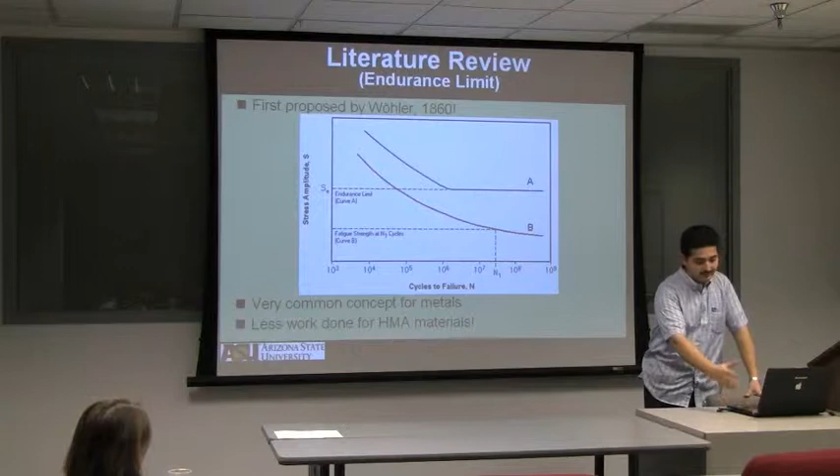So if I apply very high stress, the sample will fail quickly. But you need to reach a certain low value for the stress, below which there is no damage anymore. This concept is very common for metals, but very minimal work has been done for hot mix asphalt. This concept started in 1860, and it got picked up by our community in 1972. So it took about 100 years.

Monismith and McLean in 1972 proposed that the endurance limit for hot mix asphalt is about 70 microstrains, and they tested several stiffnesses. These lines represent different strengths of the pavement, which can vary based on several factors I'm going to talk about. They said the endurance limit is constant regardless of stiffness, and I kind of disagree with this conclusion, because I still believe the endurance limit will change with the strength of the material. But at least that's how they started.

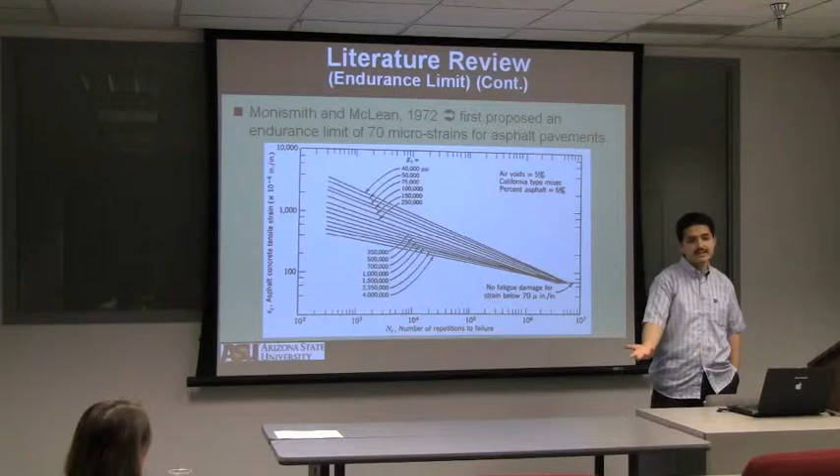Then this concept traveled all over the world and went even to Japan. Nishizawa in 1997 also reported that the endurance limit is about 200 microstrains, and he came up with this conclusion based on analysis of field pavements in Japan.

Wu in 2004 reported that the strain levels at the bottom of the asphalt layer ranged from 96 to 158 microstrains, based on back calculation using the falling weight deflectometer on some pavements in Kansas.

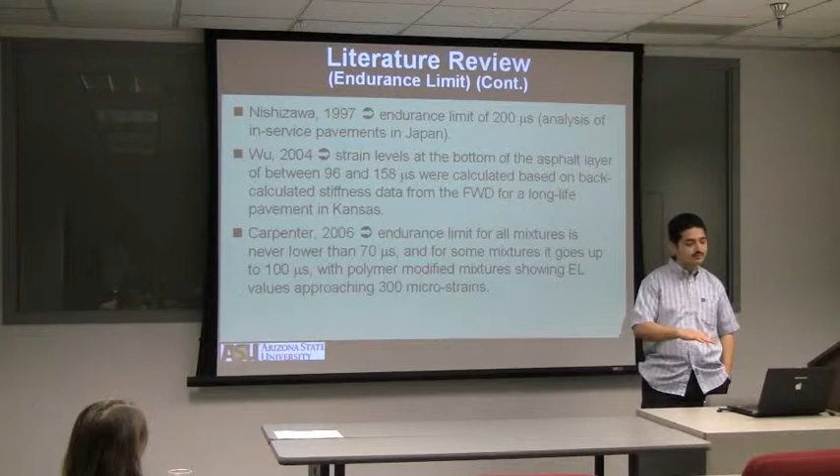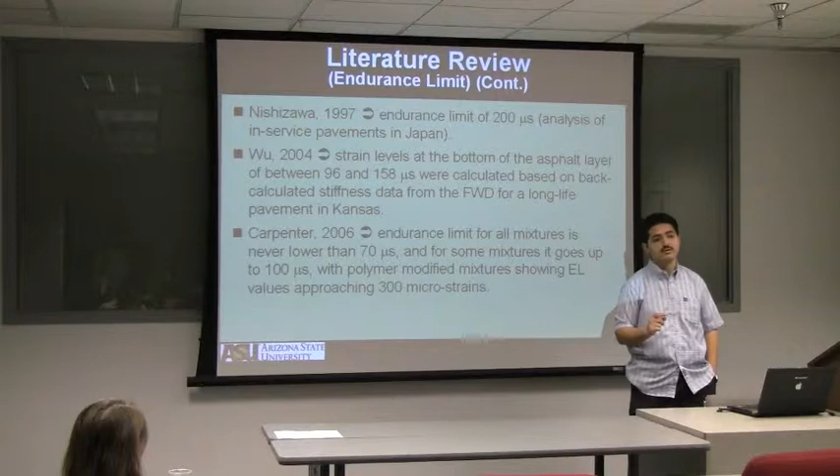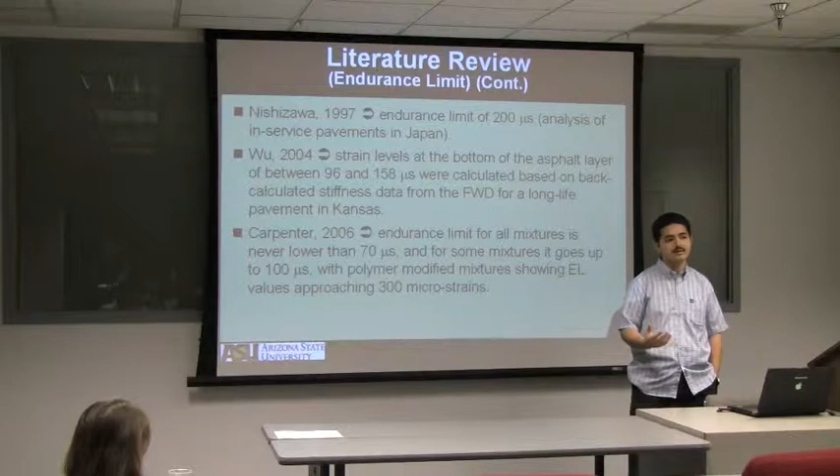Carpenter in 2006 reported that the endurance limit is about 70 microstrains, and it can go up to 100 microstrains in certain cases. What's interesting in his recommendation is that the endurance limit can be pumped up all the way to 300 microstrains once you modify your mixture by adding polymer or asphalt rubber. This shows that the endurance limit can change or improve by modifying the asphalt mixtures that we have been using for the last 100 years.

After several researchers did these individual studies, the endurance limit concept became a national interest, and there were two national projects totally concentrated on it, besides the one I'm working on. These two projects were NCHRP 9-38 and 9-44, and both showed clear evidence that asphalt performance is totally different once you apply very low strains.

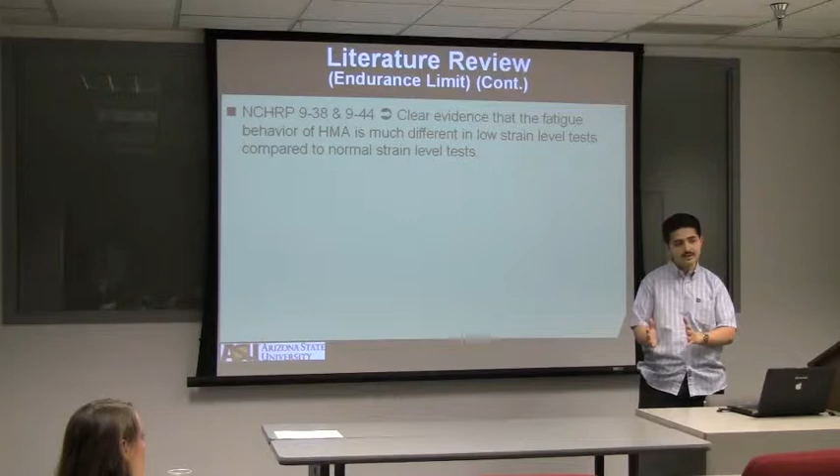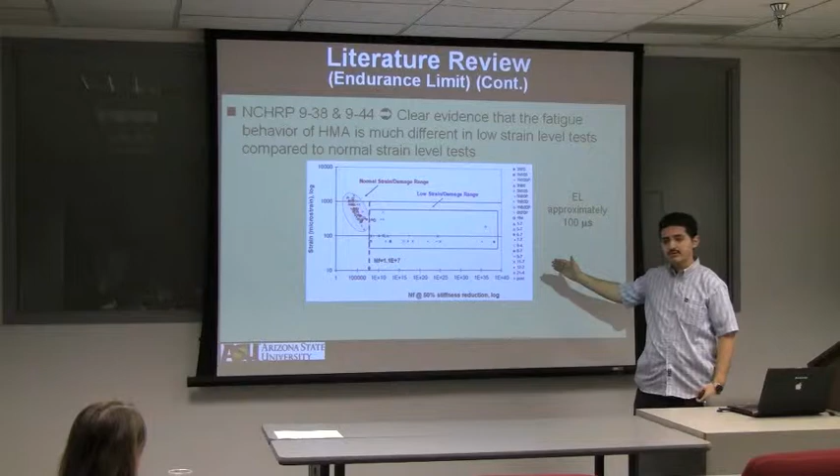What happens in these two projects involves normal strain levels or low strain levels. In the regular fatigue analysis we usually do, we apply very high strains ranging from 200 to 1,000 microstrains. But these two projects, once they decreased the strain or deformation on the sample to 70 or 100 microstrains, the sample wouldn't fail even after 50 million cycles. So they concluded there is mounting evidence that there is an endurance limit for hot mix asphalt.

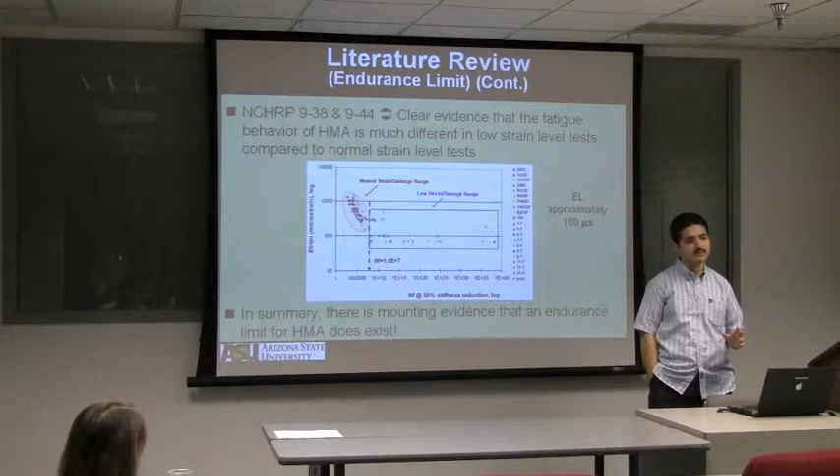So now, after I studied healing and endurance limit, I came to a step where I need to come up with my statistical experiment. I need to know what are the main factors I need to study or include in my predictive model.

So these are the factors that I used. The binder content - when I say binder content, I mean the percentage of binder in the mixture itself. Going back to the road, most of the time the binder content is about 5%. But I was interested to see if I change this binder content plus or minus, let's say 1% or 0.5%, is it going to change the endurance limit or not?

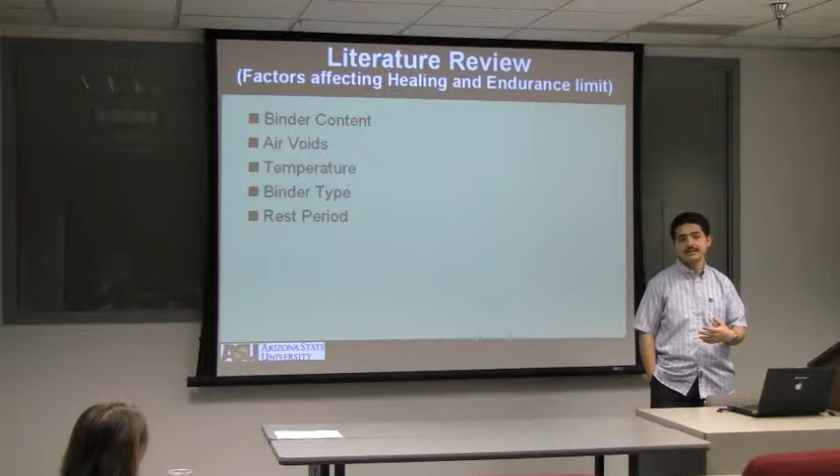Same thing for air voids, or if I change the temperature or binder type, or even the rest period, which is the most important part. If I put 5 seconds rest period between each cycle versus 10 seconds, am I going to see a difference in the endurance limit or not?

One of the projects that talked about the effect of the air voids and the binder content was the SHRP A-003A in 1994, and they mentioned that at higher asphalt content and lower air voids, this can lead us to a very high fatigue life.

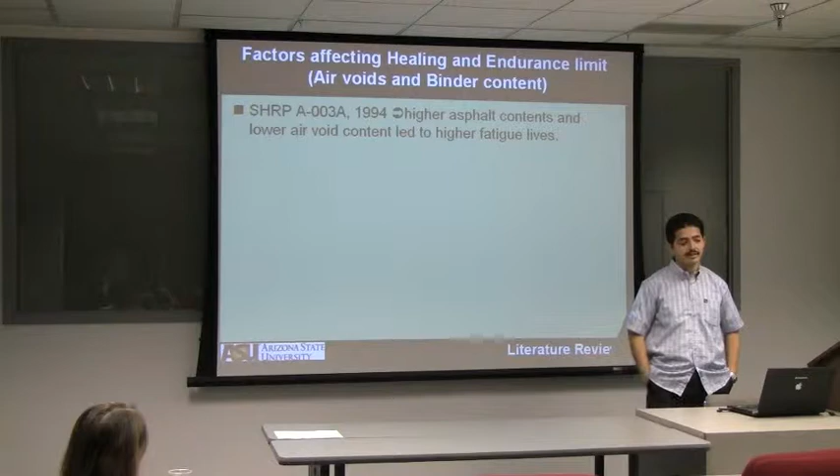Another project was done by Harvey and Tsai in 1996. They mentioned that lower air void content will lead to a higher initial stiffness and a higher fatigue life. On the other hand, once you decrease the binder content, this will have a lower fatigue life.

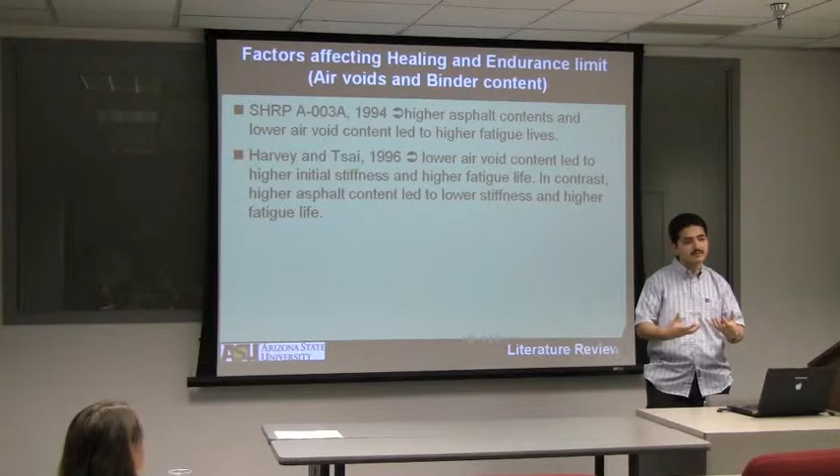So here, as you can see, in contrast, higher asphalt content gives lower stiffness but higher fatigue life. It's a matter of once you increase the viscous part, or the flexible part, which is the asphalt, the material will be more flexible and it's going to take much longer to fail.

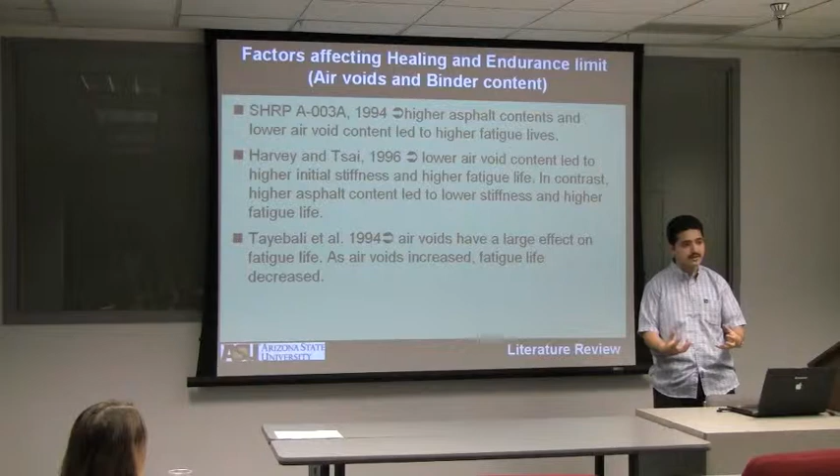Same thing based on Tayebali in 1994. He mentioned that once you increase your air voids, this will decrease the fatigue life. Imagine you have a sample - once you keep increasing the air inside it, it's going to be much weaker, so the fatigue life will be much smaller.

So at least now I know that there are two factors that are important for me to study: the air voids and the binder content. Moving on to the other two factors, temperature and binder type.

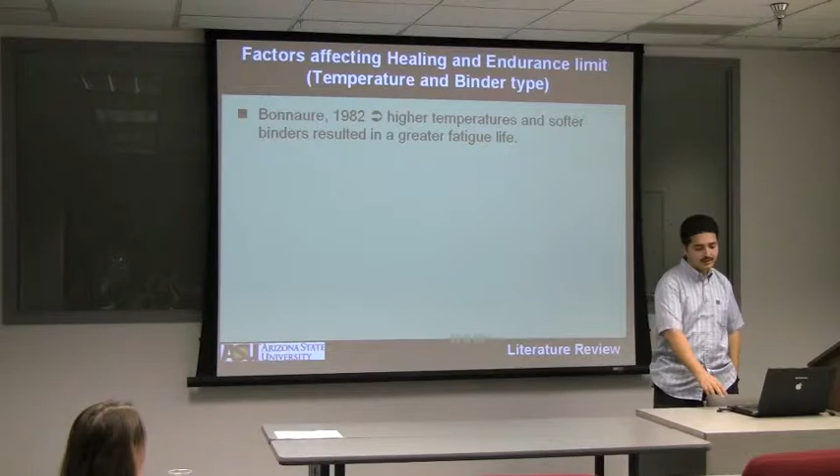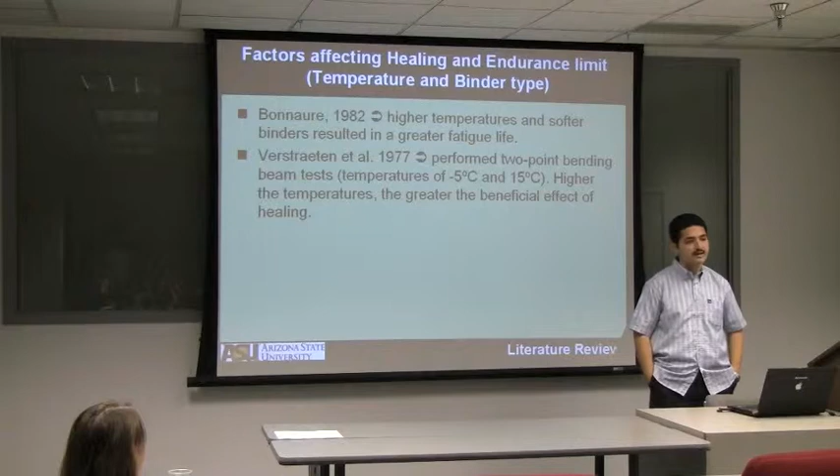Bonnaure in 1982 mentioned that at higher temperatures or softer binders, this will result in a higher fatigue life. Verstraeten in 1977 also performed fatigue testing for different temperatures, from -5 Celsius to 15 Celsius, and concluded that higher temperature gives more benefit in healing compared to lower temperatures.

Moving to the other factor, which is the rest period - this is the most important factor in the endurance limit. Bonnaure in 1982 also applied a rest period between the cycles, exactly close to what I'm doing right now, and he found an increased fatigue life of up to, I think, 10 times.

So if I apply a continuous test, meaning there is no rest period, this can fail the sample, let's say, in 1,000 cycles. If I apply a rest period, it can go to 25,000 cycles - 25 times.

But something interesting that he mentioned here is that you will get the maximum healing possible by applying a rest period equal to 25 times the loading ratio. Let me stop here and explain. For the loading time, I apply a loading time equal to 0.1 second.

So that means I apply 10 cycles per second. What he mentioned is that you are not going to gain any more healing by applying a very high rest period. Once you apply a rest period 25 times the loading time - in my case, 0.1 second times 25, equal to 2.5 seconds - he's telling me that if you have a rest period equal to 2.5 seconds or more, you are not going to gain any more healing. The full healing, as I mentioned earlier, will happen by applying 2.5 seconds.

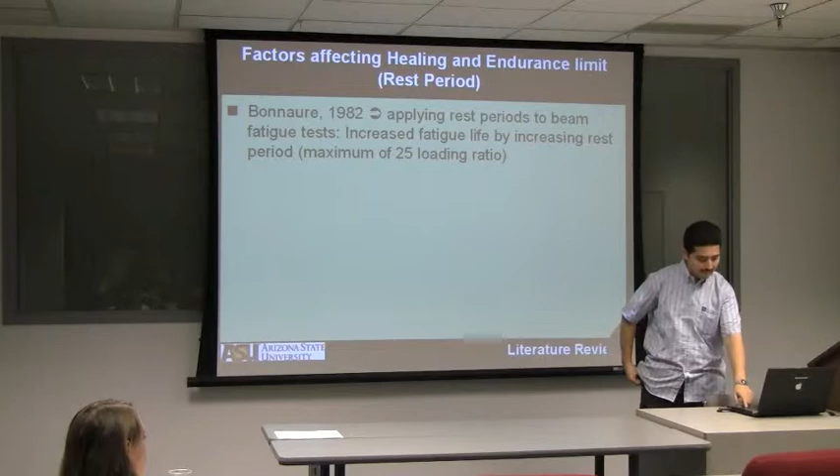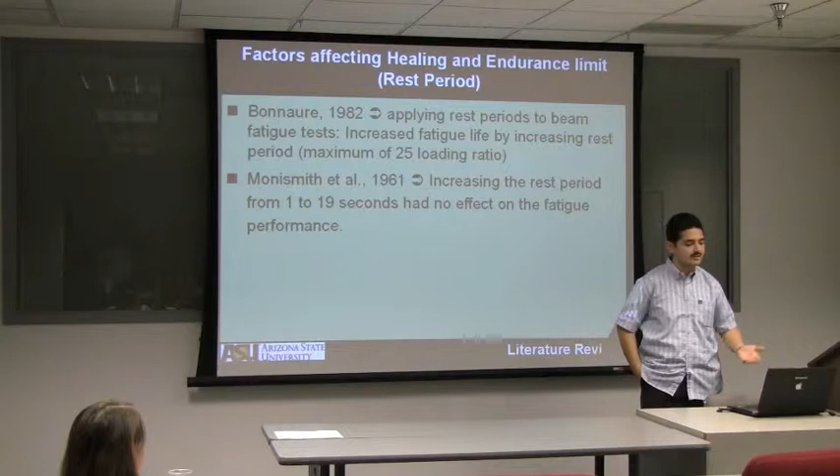Monismith in 1961 came up with a similar conclusion. He said increasing the rest period from 1 second to 19 seconds showed no improvement in fatigue life. He tried rest periods from 0.5 seconds up to 19 seconds, and concluded that by 1 second, it's more than enough to have full healing.

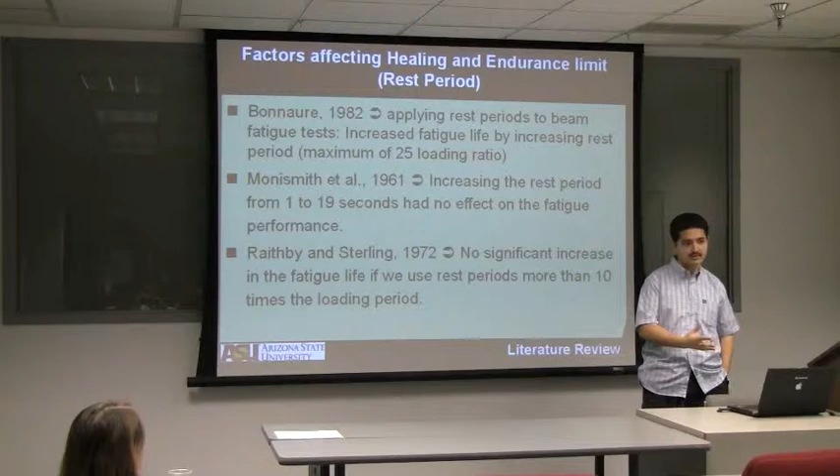Raithby and Sterling, also 1972, mentioned there is no significant increase in fatigue life if you use a rest period more than 10 times the loading ratio. That means if you apply a 0.1 second loading, the maximum 1 second gives full healing. Van Dijk, also in 1977, mentioned that increasing the rest period can increase fatigue life up to 10 times, from 1 to 10 times.

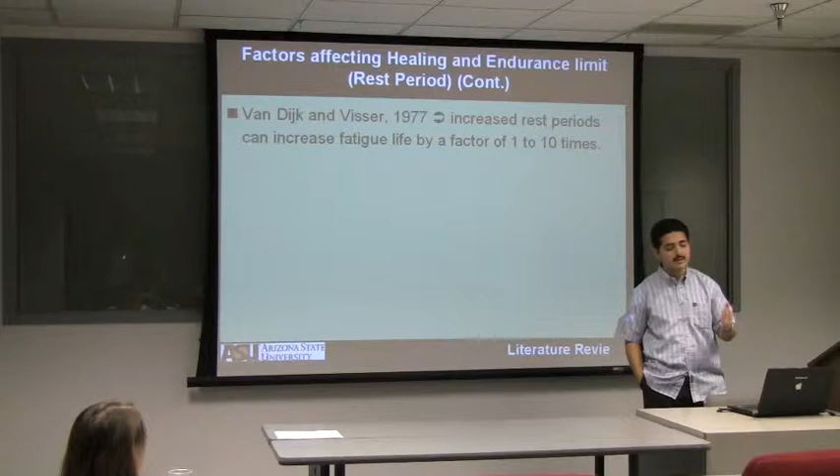This is one of my favorite quotes, because it strengthened my hypothesis from the beginning that the endurance limit changes.

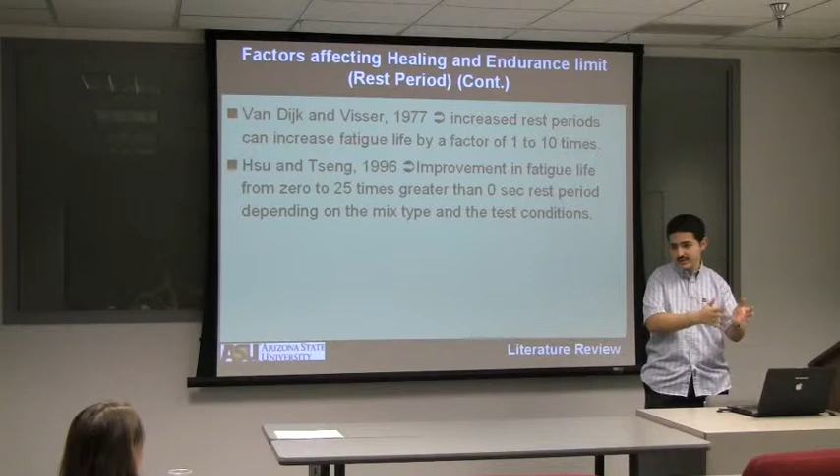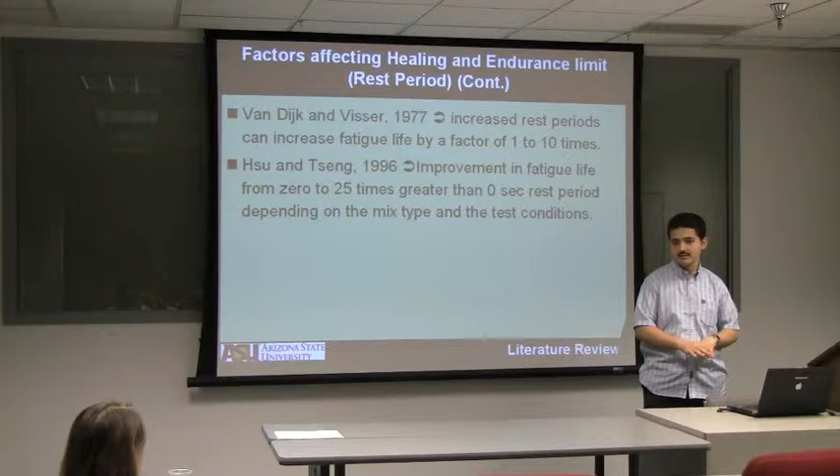Hsu and Tseng showed an improvement in fatigue life when applying a rest period, from 0 to 25 times compared to not applying any rest period. But they say this improvement depends mainly on the mix type and the test conditions. So the endurance limit is not constant — it keeps changing by changing your mix design or the testing conditions.

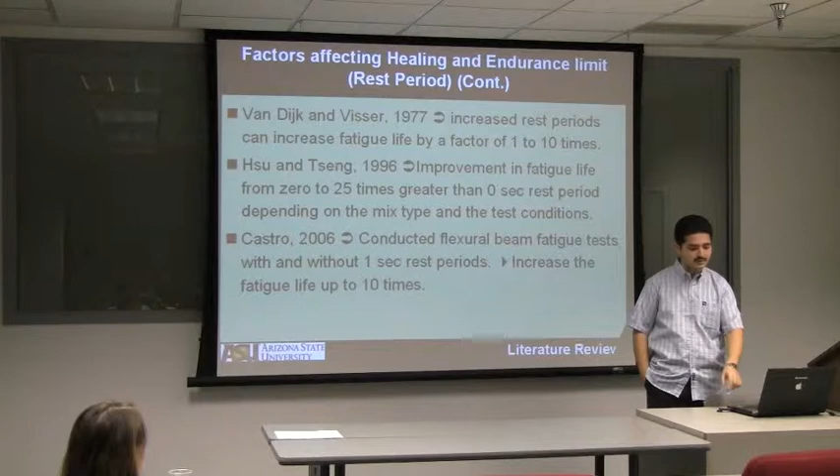Lastly, Castro conducted the flexural beam fatigue test with and without a 1 second rest period, and had an increase in fatigue life up to 10 times.

So, done with the literature, now I know exactly what's going on and what other people did, and I was confident to build my statistical program or statistical experimental design.

So I used 6 factors. I'm calling it a 6-factor fractional factorial design with partial randomization. Six factors because I'm considering 6 factors in my experiment. Fractional factorial means I'm not testing every single combination, otherwise I'd finish my Ph.D. in 20 years.

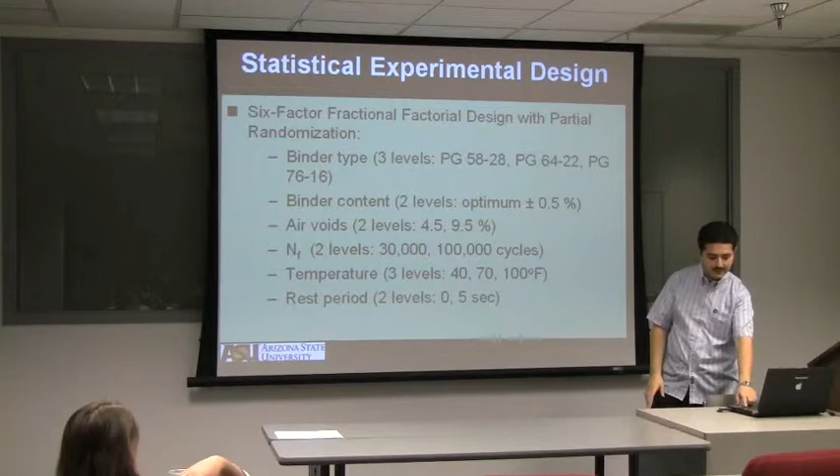The last part is partial randomization. When preparing the testing samples, it's very hard to keep full randomization, where I'd keep picking randomly from all over. Instead, we decided to finish one binder at a time, since there are several binder types — the one we use in Phoenix is different than the one in Flagstaff. So I finished one binder at a time, and that's what we call partial randomization.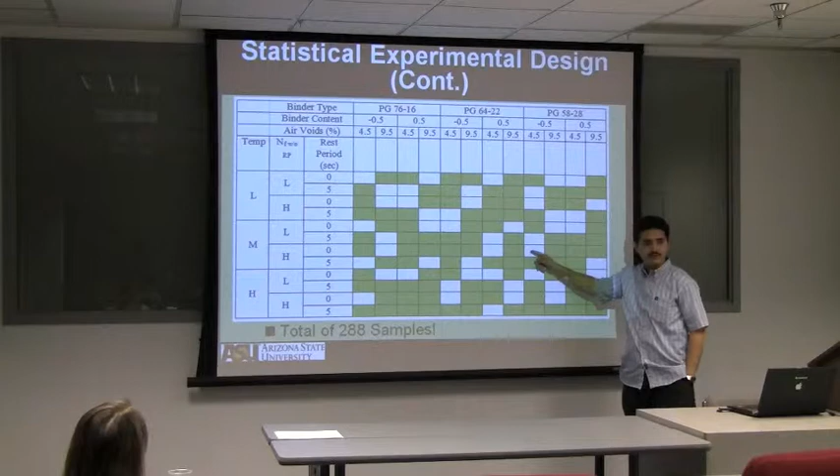This is my statistical experiment plan. As you can see, there are different binders, different air voids, and different binder contents — those missing cells are because of the partial fractional factorial. Even so, I still had to test 288 samples. I started in September 2009, and finished this year, I think in April.

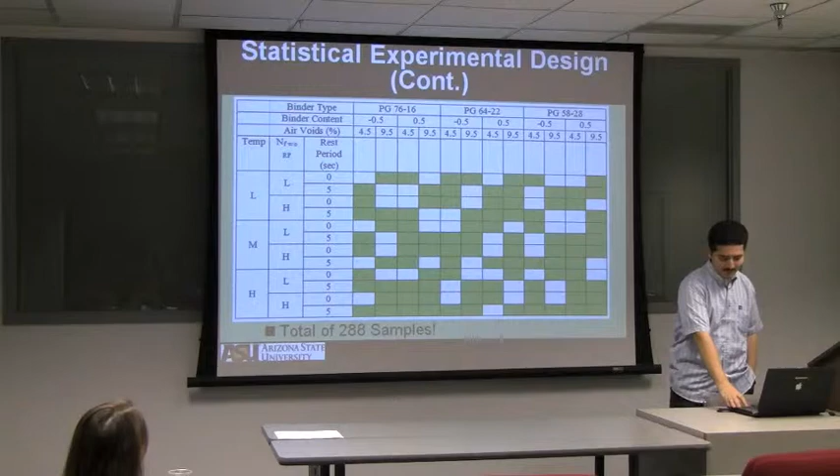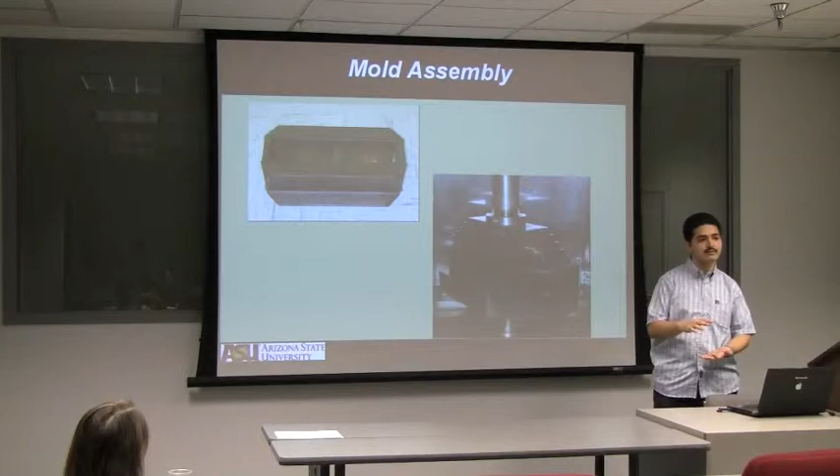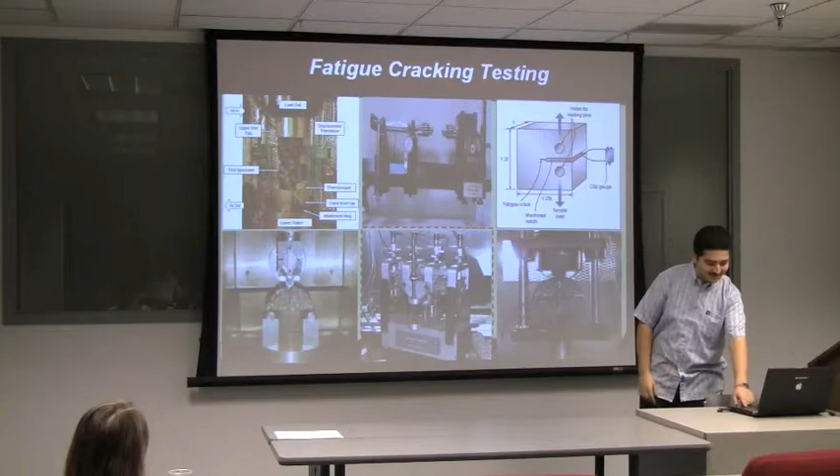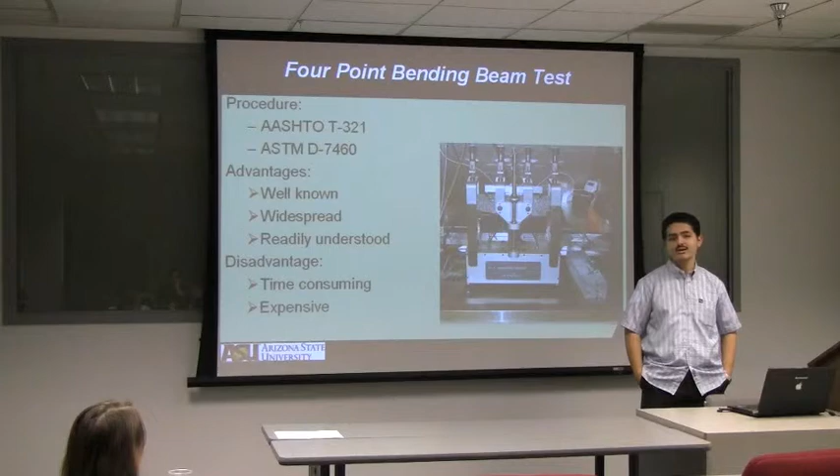But my favorite one is the 4-point bending beam test. Why is it my favorite? Because it's a very standardized test — it's been around for 30 or 40 years, with procedures from AASHTO and from the ASTM. So everyone knows how to deal with this test — it's very well known and understood. But the disadvantage is that it's time consuming; you need to do a lot of testing to be confident of your conclusion, which means it's also expensive.

So now going to the...